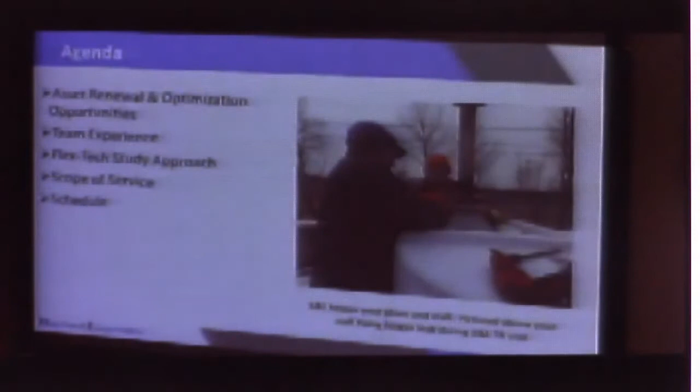So with that, the three of us, myself, Pete, and George, are going to run through some of these.

Ken, I don't mean to cut you off, but in the new world of COVID these workshops are now televised, and I don't know without a microphone if people at home can hear. I can hear your voice fine. You can hear it? Okay. We've gotten high tech, haven't we, Ken? I'm wired up, never mind. No problem, yeah, at any time, sure.

If anyone has any questions, this is open discussion, okay? So feel free to interrupt us.

So, a fairly quick agenda tonight: talking about your asset renewal needs, meaning what equipment needs to be upgraded following your clarifier replacement, and what are some of the optimization opportunities, both on the process side and more in particular your energy use side. What do we bring to the table? Why is B&L being considered for this?

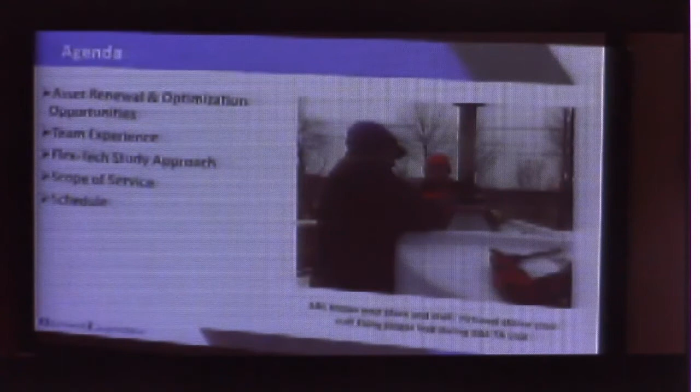That's kind of going to be between George and I presenting our experience. We are a Flex Tech, NYSERDA Flex Tech appointed term contractor. So I'm going to get into that, and it's through NYSERDA that we'd like to prepare a study here that takes a deeper dive into your energy use and optimization of your process, basically to save money.

That said, we're going to run through a general scope of service. It's pretty similar to a PER, but it's going to take a deeper dive into your solids handling process and energy use. And then the schedule, which is pretty aggressive, acknowledging that you're on the heels of this phase one project wrapping up, and funding programs starting to come out. We want to hit the ground running, you've got to be shovel ready. So we're going to go through that as well.

And I'm George Bennington. I've been with B&L on both sides of the aisle. They were a client of mine back in a previous life. The last several years I've been back on a daily basis.

I was kind of lucky because Art brought me in a year and a half or so ago to do a little bit of technical assistance, and I got to work with your staff on some biogas issues, digester issues. So we've gotten to know your folks, and that's really important because the last thing you want is the engineers to come up with a great solution and not have the staff buy in. This is the day I was out there doing some technical assistance, and I was pretty impressed with the maintenance and operations staff. We solved a few problems.

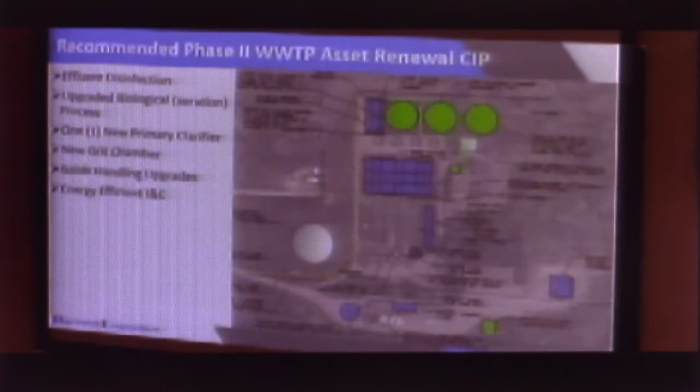The concept of Phase 2 really was that the PER presented the overall plant upgrades. The current Phase 1 project was driven out of necessity, what the really immediate failed infrastructure was. So it includes some of the other supporting components: effluent disinfection, an upgrade to the biological treatment process, additional solids handling, meaning the primary clarifier and the additional grit removal process, upgrading the solids handling systems, and then overall just energy efficiency.

When we talk about energy efficiency, a lot of it's driven by aeration. The plant is operating somewhat blind. There's a lot of new technologies and new innovations regarding how to make a biological system more energy efficient.

So I got to talk and drive here.

So to mention real quick with respect to the asset renewal and the opportunities for the aeration process, these are the aeration tanks. These are kind of sketched as what the current concept would be. Currently, the tanks operate, there's three basins, and ultimately...

Unfortunately, I can't point to this. Let me go back. One of the challenges with the facility is simply footprint. There's not a lot of area to develop. So the process we're focused on is really about providing more...

More conservation of space. It's called a fixed film process. The specific process we looked at was an integrated fixed film activated sludge process. So essentially we take the same tank, reconfigure the plumbing, and add media in there, essentially increasing the surface area to enhance the biological efficiency of the process.

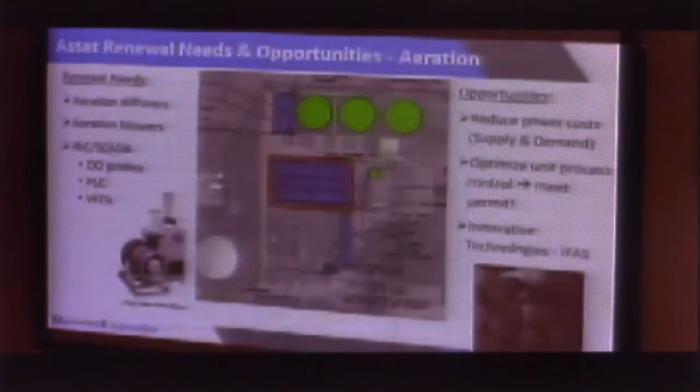Along with that, the biological process runs on blowers. Those blowers push air through a lot of diffusers in the bottom of the tanks. They currently run, I think, continuously right now. So a modern facility will monitor oxygen levels and ramp the speed of the blowers up and down, and new blowers will come on as needed. So there's additional controls that in and of themselves will provide some significant enhancements to energy efficiency.

Second part of this, the crux of this, and I think this is really what's driving a lot of these discussions, is the solids handling. If we look at the Phase 1 project, that need arose from clarifiers that had failed. The town was really limping along with about 1.5 clarifiers. And since Art's been involved, and certainly since Rick's been involved, there's been an identified need.

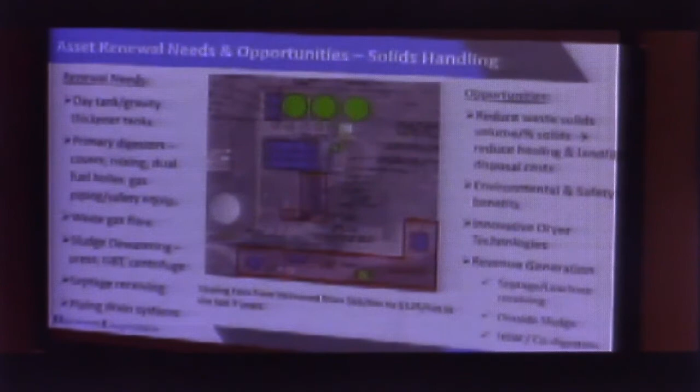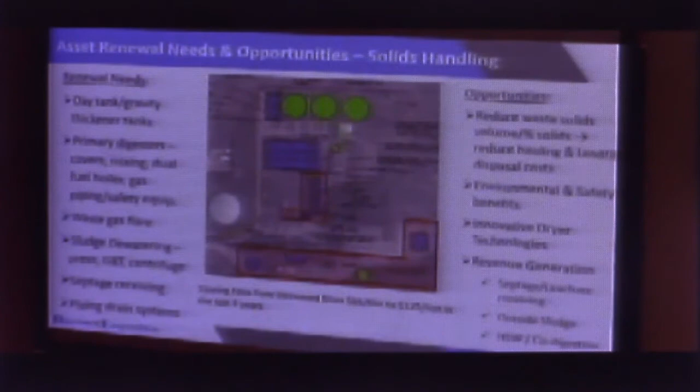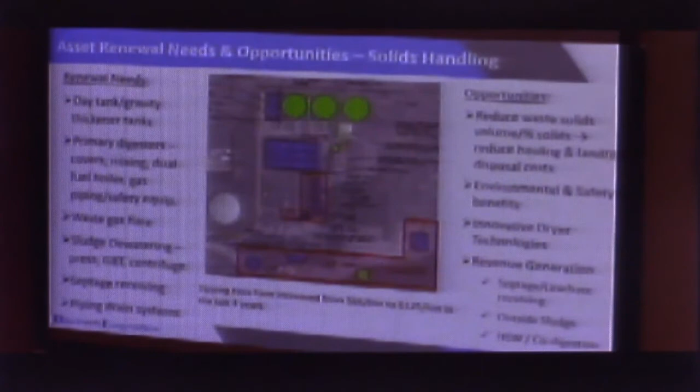That was reflected in the original PER, that the solids handling facilities are deficient. Our findings indicated that right now there's not enough capacity just to digest the solids, but there's also safety issues. There's issues with the digester covers, so there's a lot of methane currently being leaked to the atmosphere. The gas flare that's required to control that gas is not currently code compliant, and it sits on top of the building. So there's a lot of issues with respect to code compliance, safety, and overall efficiency of the system.

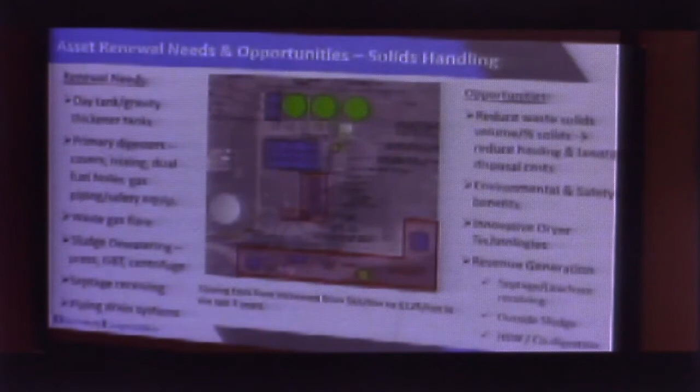The other piece of this is that the digestion process itself, by not being as efficient, ends up generating more solids than you need to. The end result of that is there's more tonnage leaving the site, and there's a tipping fee issue with that. So obviously a more efficient digestion or solids management process ultimately leads to reduced volume, reduced percent solids, and reduced tonnage that requires landfilling.

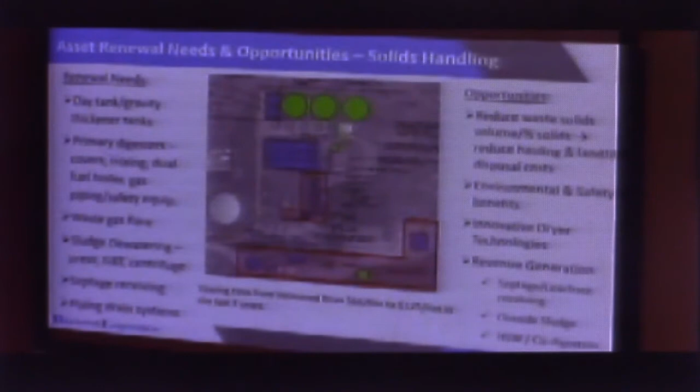I mentioned the environmental and safety benefits. Part of the focus, and this is where George comes in, is with respect to some of the new technologies that are out there. There's a lot of things happening, and the market's kind of driving a lot of these needs right now.

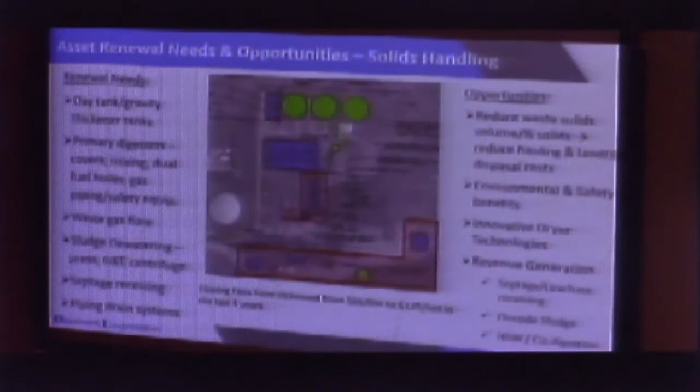Landfilling, as the tipping fees have significantly increased, and Art can attest to this—I think $65 per ton is probably the number we plugged into our original study. We're currently at over double that. Coupled with that, locally there are landfills with limited capacity: one closes in 2028, one closes in 2025, and the two Monroe County landfills will currently not accept Town of Webster sludge.

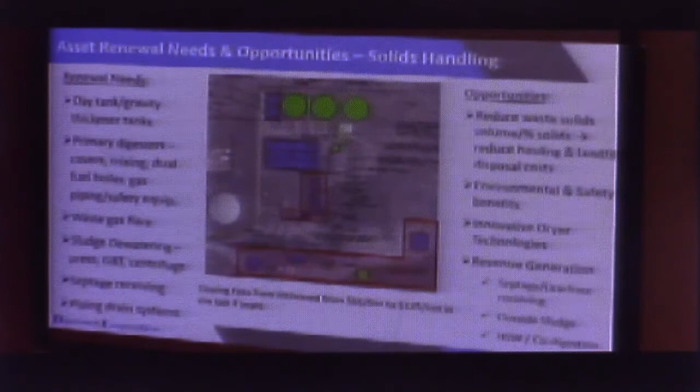And with that, I'll turn over the conclusions. So to summarize what you've already heard from Art and Rick, as well as what Pete has run through here, there are several reasons why this project needs to be done and the benefits to the town. The most pressing is that you've got very old equipment that needs to be revamped and replaced with modern equipment to make it more energy efficient and code compliant. Of course, your ultimate goal here is to increase and improve operator safety.

Aeration, if that's not addressed, you start to run into SPDES compliance issues. Of course, meeting your SPDES permit limits is the job of your operators—that's a must, as you know. You want to avoid that. Tipping fees, as Pete just reviewed.

And with a facility like this, as George and I are going to discuss with a few examples, you've got the opportunity to turn this into facilities that could provide revenue in the form of a merchant facility—taking septage and leachate, which you've done in the past, but some of your recent equipment deficiencies have stopped that.

Energy and process optimization, again, is not only good for your bottom line each year, but there are also grants that can be leveraged by looking at that. We are going to revisit the design flows and loads. I think the last ones we had were probably from 2017.

So here's a few examples, some within New York State and some outside. A couple of these we would consider true conversions to water resource recovery facilities. The first one, very similar in size to Webster's, would be up in the village of Malone, way up north. This was recently completed last year, and it included improvements across the board, from septage receiving to headworks to the primary clarifiers area. In this case, they had RBCs.

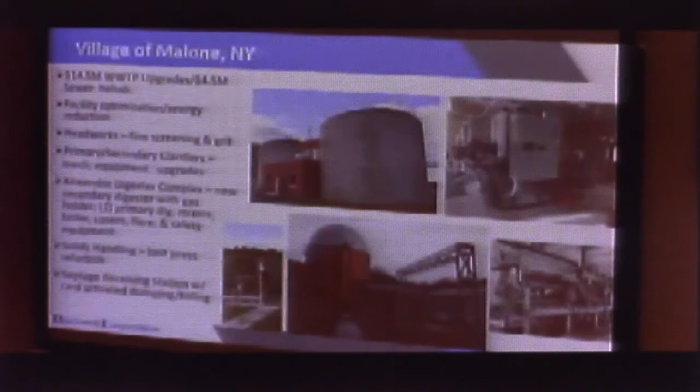Could you speak up a little bit, please? Sure, let me come out here, maybe where you can see me.

Again, improvements across the board, both in the headworks facilities, a lot of similar improvements to not only what's been completed at your plant, but also what we envision being completed. But in the solids handling in particular, a very similar setup, wherein they have two anaerobic digesters. All of the older gas equipment and pumps were in the central building here, in the sludge heaters, and the covers as well were old.

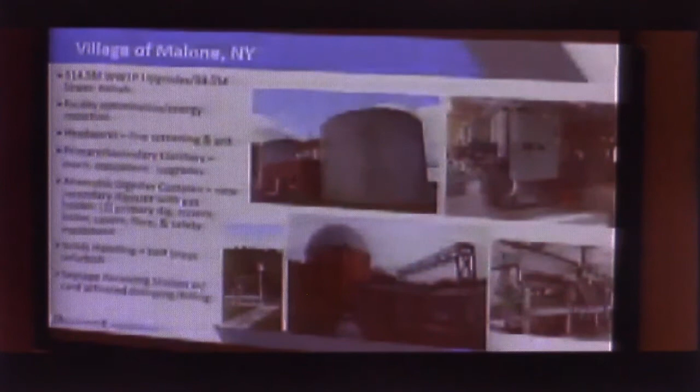So we came in and reconfigured this, basically upgraded these digesters, did structural improvements, cleaned them out because tanks like this probably haven't been cleaned in some time. We put new covers on them, did all new gas handling, a brand new premium efficiency boiler and sludge heaters, revamped their sludge press, and this over here was actually a brand new tank that is a secondary digester.

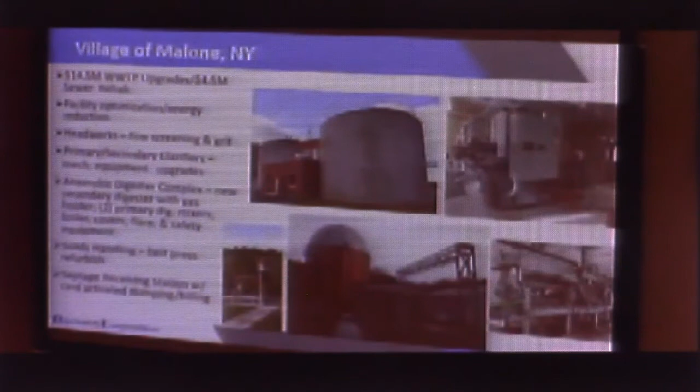You use your primaries to heat the sludge and break it down. That then makes its way into the secondary digester, which is ambient temperature. That's where all your gas builds up, and this bubble right here is actually a gas holder on top. So instead of a floating cover, this is some of the latest technology used to store your gas. In addition, they had a non-compliant flare, which has to be 100 feet from any building, I believe, so we put a new flare in for Malone as well.

Another example up in the North Country. Ken, can I ask one question?

Malone is 3.3 MGD average and an 8 MGD peak. Is Webster 5 MGD and a 7.5 peak? Town flow, yeah, 7. No? Go ahead, Rick. No, permit is 7.5, it's 2.5 is the village. We're designed for 5 million average. Speak up, I couldn't hear that. Sorry, our permit is 7.5 million, but 2.5 is the village. Right, our treatment capacity is 5, fine. Average about 3, right? We're averaging about 3 now. Yeah, so that is close to Malone.

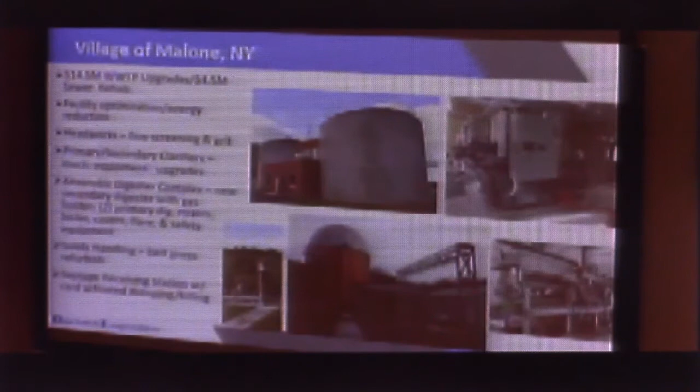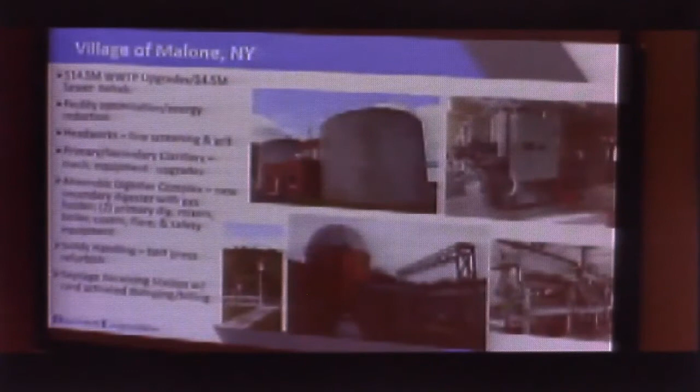A couple things too, you see a belt filter press here. Currently, you have a centrifuge and an older press. You're going to see some different technologies here. Again, these are things we would look at as alternatives, similar to a PER. And then also with septic receiving, you can run the gamut from just dumping into a manhole with a screen, or in this case we put in card-actuated dumping where you can keep track and every hauler gets a card, and so on. It goes in that way.

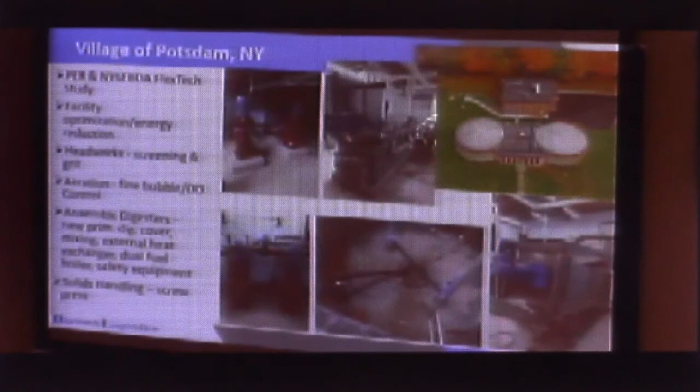So again, in the village of Potsdam, 2 anaerobic digesters, a very similar configuration again to what you have here in the town. We came in and basically revamped all of the gas handling and safety equipment, the covers, the pumps, sludge heating. Sludge mixing is critical for efficiency and maintaining temperature in your anaerobic digesters.

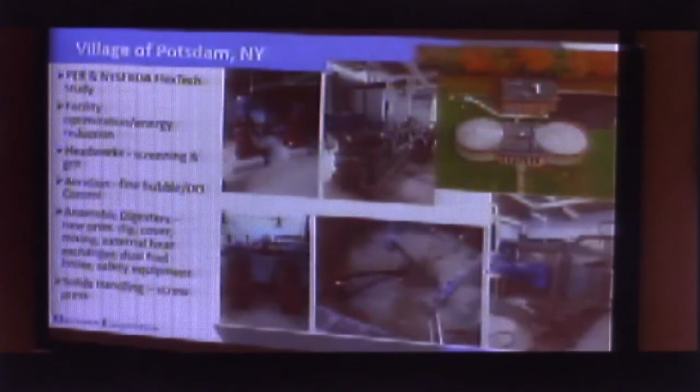Ken, what is that bottom picture, what are we looking at? So, again, you take these covers off. Typically, you're going to have a concrete structure that needs refurbishing, and everything's got to be clean. Once you do that, what we did here is come in and put in this piping system with directional valves, and this basically takes liquid sludge and pumps it into the digester, and in different directions gets a nice optimal mix going in at full depth in the digester.

Right now, what's your mixing system consist of?

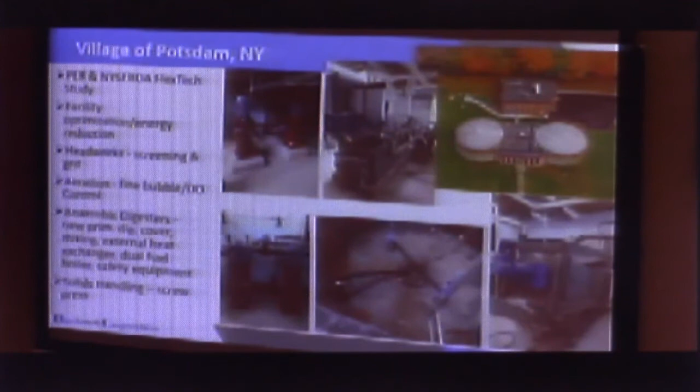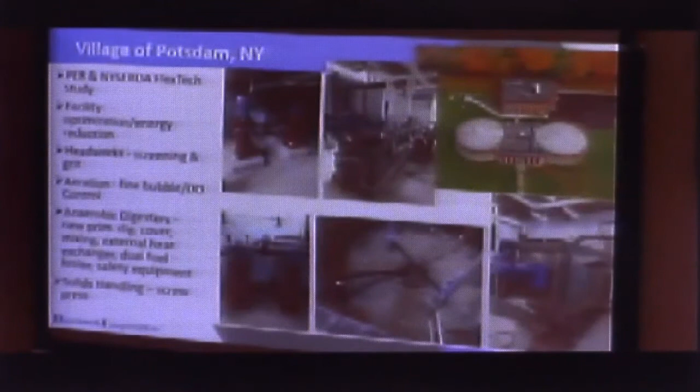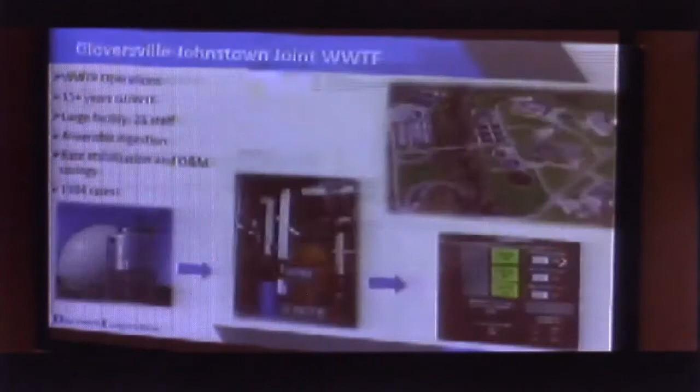Versus another opportunity is a roof-mounted mixer, which George can cover. And in this case, that's a screw press, which is some recent technology that we've been using at some of the smaller plants.

So the 6 examples we're showing you, Ken has gone over the first 2 because he's been more involved in those, but I've actually had involvement on both of those facilities as well, in concept and a lot of the startup issues that happen at all these facilities.

So I've been to both, but I really cut my teeth in the anaerobic digestion world by managing the Gloversville-Johnstown wastewater plant for over 15 years, about 3 hours to the east of you.

When you talk about the term WRF, Gloversville-Johnstown tried to become one of the first WRFs in New York State. Everybody can get to that term, but everybody doesn't have to do it the same way.

For Gloversville, it was about expanding anaerobic digestion capacity because of industry in the area. A lot of dairy waste is there because of the Fage and Euphrates Cheese Company, and that waste is converted in the anaerobic digestion process.

The middle picture is power generation. Gloversville-Johnstown generates all of the power at their wastewater plant from converting the organic waste to biogas, plus they actually export excess power. So that became one of the first facilities designed by B&L to export power in New York State.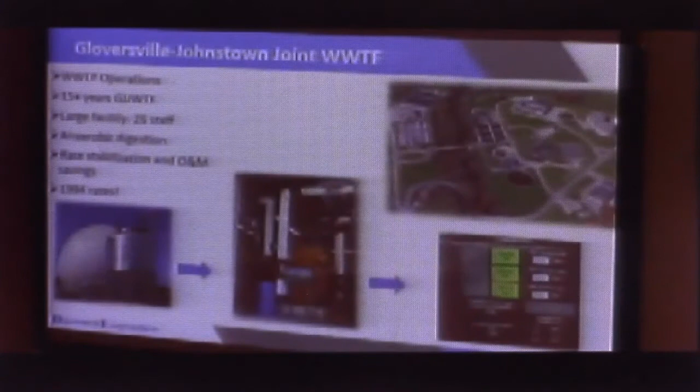To the left is the gas holder, technology that's going to be very similar for Webster. The bottom line is the WWTF at Gloversville-Johnstown was very nice - it's a nice term, but Gloversville-Johnstown tried to say we had declining population, we had to change our business formula.

In taking advantage of the anaerobic digesters, it helped stabilize sewer rates. So instead of sewer rates raising, they used the resources of reclaiming energy to help their bottom line. That was the main driver for that facility.

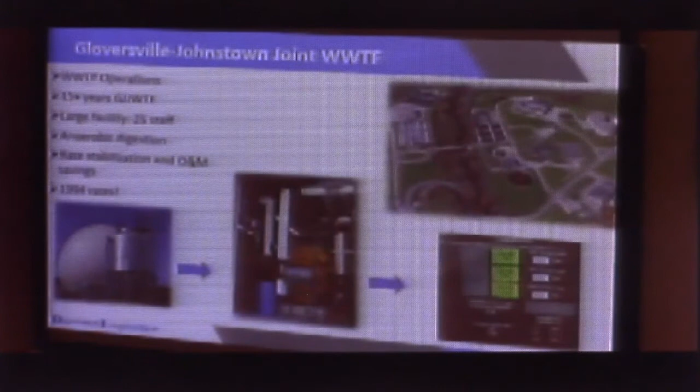There's someone in this room who spent a lot of time at Rome. He's your current operator. He embarked on a project to take old digester technology that was in disrepair, and a project we are in construction right now on is taking a digester.

The bottom left picture is a 70-year-old anaerobic digester that was in very bad shape. The good news is the concrete was good. It needed covers, it needed a mixing system.

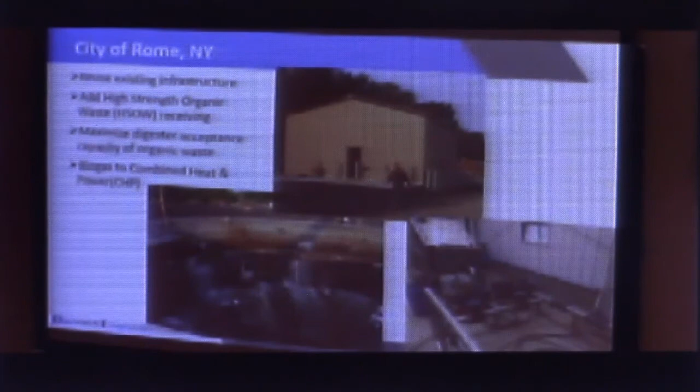That's the pumped mixing system like Ken was showing you from Malone, from Potsdam, a similar one being installed. That technology is being used on one of their digesters. They're going with some other technology called a linear motion mixer, some of the new cutting-edge stuff that's out there for one of their other digesters.

So existing tanks are being reconstructed as part of this project.

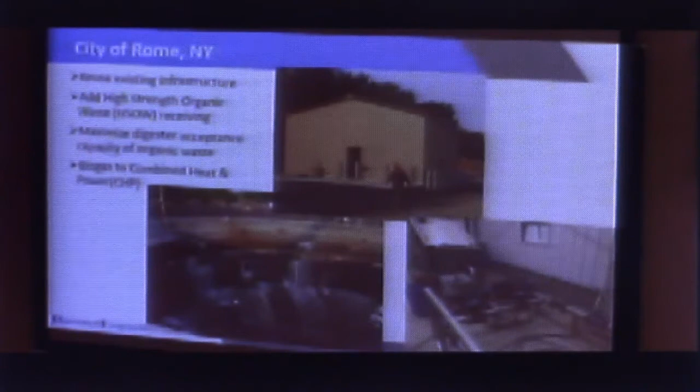They have screening equipment to screen waste, organic waste, to get debris out of it before the waste goes into the digester. That building up there is so they can accept tankers - as trucks bring the organic waste, it can be screened prior to going to the digesters.

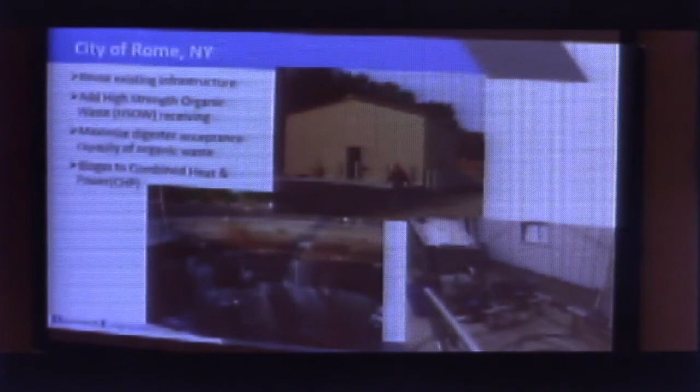So this project has been a lot about creating additional revenue, but also improving the only part of the plant that wasn't improved, and that was the solids handling systems in the anaerobic digesters.

Town of Niskayuna is a project, a $30 million project that was a rebuild of the plant, but 25% of it is a project that involved the solids handling.

Bottom right, it's a belt press. Their belt press was falling apart, it was rotted away. This is a new galvanized belt press being installed.

The middle bottom picture is a new cover going on their existing digesters. Digester covers are not in good shape at the Webster facility.

They're actually in very poor shape. Those would be removed as part of this project, and possibly a cover similar to what you're seeing could be installed. They had some tanks that had the gas storage on top, similar to what Ken was talking about earlier.

Yes, sir. I noticed in a lot of your presentation, I see belt presses.

Webster changed to a centrifuge about 15, 16 years ago, and used the belt press as a backup in case of breakdown. Is belt press the way to go now?

No, it could be. Their centrifuge is a wonderful tool, belt press is a wonderful tool. You have those choices. The facility I ran made a conscious effort to stay with belt press because the maintenance staff could maintain it. They felt comfortable with it. They had been maintaining the bearings and belts.

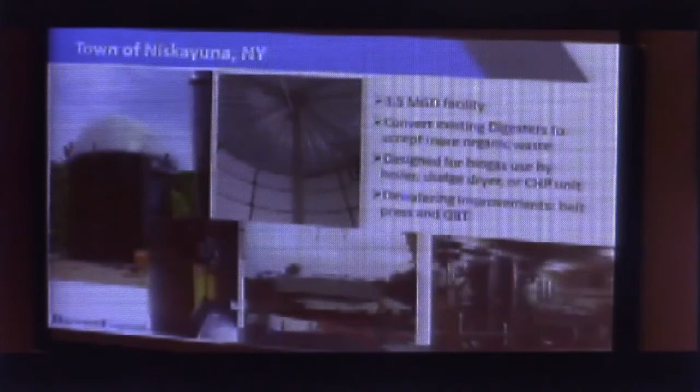What belt presses are great at is they run very, very slow RPMs. The bearings turn very slowly, so they tend to have less maintenance on them. Most people who have socket wrenches and torches can put a new bearing on or put a new belt on. The centrifuges, from when I was running a centrifuge in Rochester Northwest Quadrant plant back in the 70s, was rare. They were kind of original centrifuges, relatively slow.

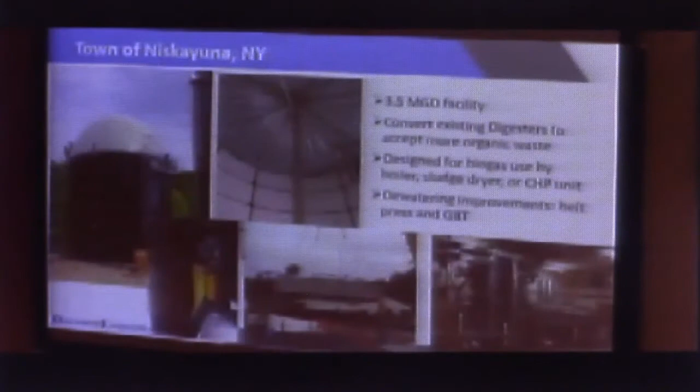These new ones are extremely fast RPMs, and I'm sure Art would agree, it's not something that can be maintained easily by our standard maintenance staff. It needs specialty people. So it depends what's important to you.

Secondly, the centrifuge actually produces a very good cake product, but it's using a lot more energy to do that. So if kilowatts are important to you, because let's say you're spending 15 cents a kilowatt hour, maybe the belt press would be better. So it depends on your situation. Tipping fees, electricity costs, all those things go into it.

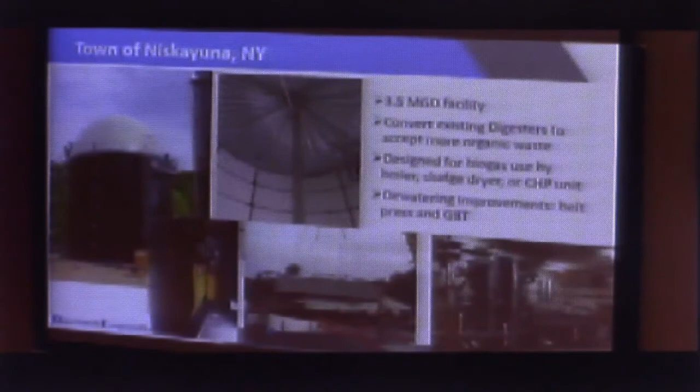So I think you have an option. Obviously you know both technologies. Either can work. It's really a local decision. Okay, thank you.

No, you're fine. So we move on to a much larger project. And it's interesting, this is Altoona, Pennsylvania. This is under construction right now. The picture on the left, there's some brand new digesters being built. This is a community that never had an anaerobic digester. They're getting into the anaerobic digestion business because they want to

make a solids product that eventually becomes for beneficial use and gets back on a cropland. So to do that, they wanted to stabilize their sludges through anaerobic digestion, and then they want to put those sludges through a sludge dryer. Because in Pennsylvania, similar to some of the problems we're having here locally, there's getting bans on how much sludges and cakes can go to the local landfill.

Just was on the calls today at this facility in Pennsylvania. The B&L designed sludge dryer is going to be delivered in October. So what's interesting here is this project's a lot of money, a lot of work being done, but I will note the power generation that Gloversville Johnstown does will not be happening here. They're going to take all that biogas and put it all into their sludge dryer. Instead of buying natural gas, they want to use biogas to do the cake drying.

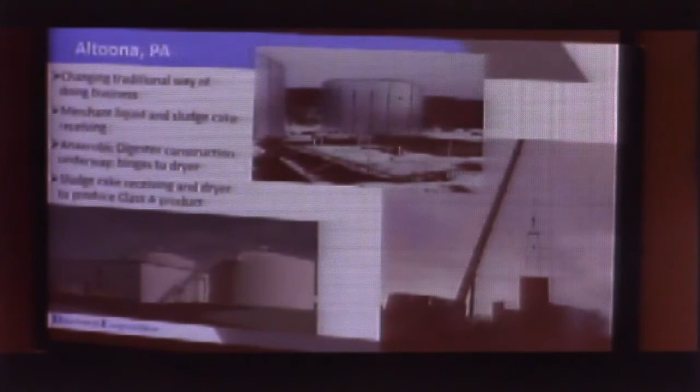When you're all done, that cake, instead of having 80% water in it, or 75% water depending on how good you do, it's going to have 5% water, 95% solids, so only a few truckloads are going out either for disposal or for beneficial use to a farm.

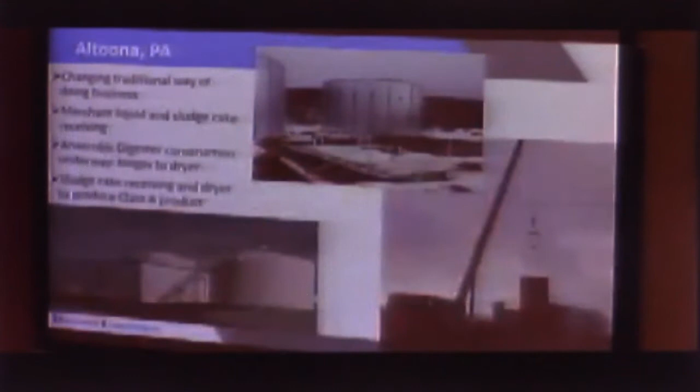So that kind of runs the gamut, and what you see there in the discussion on the presses for the sludge. Minimally, we're going to look at 3 different types of presses, which are going to be driven again by what the preference is and the staffing capabilities are. So with this, I'm sure you don't want to hear you got to do another study, but you have to do another study. But it's going to take a different look at this, with a different spin on it.

As I mentioned, as a NYSERDA Flex Tech consultant, we have the ability to bring these projects to NYSERDA, wherein they will fund a portion of the study cost, which I'll get into. We became a Flex Tech consultant based on our qualifications, and minimally we need to bring three projects a year, I believe. It starts as a planning grant, and ultimately what you're doing is developing a PER with a capital improvement plan that could ultimately leverage implementation money through NYSERDA as well.

As I said, it's consistent with what's been done already with the EFC, DEC compliant PER. So we're going to leverage as much of that as we can, especially on the process evaluation side. But again, we're going to take a deeper dive into the alternatives, power use, life cycle costs, and compare all of those to come up with an ultimate recommendation based on your preferences and equipment.

So that pretty much covers that.